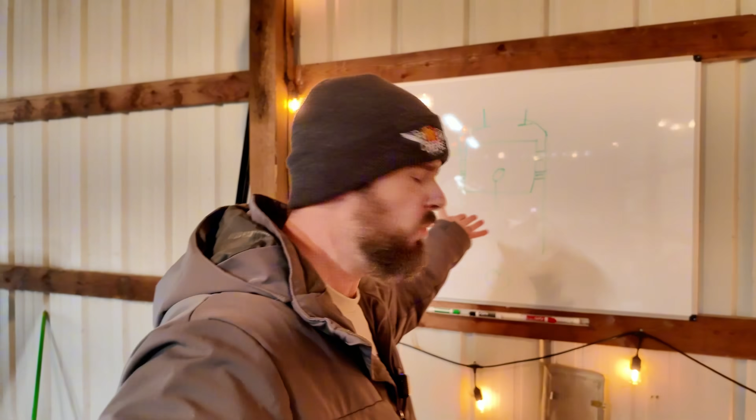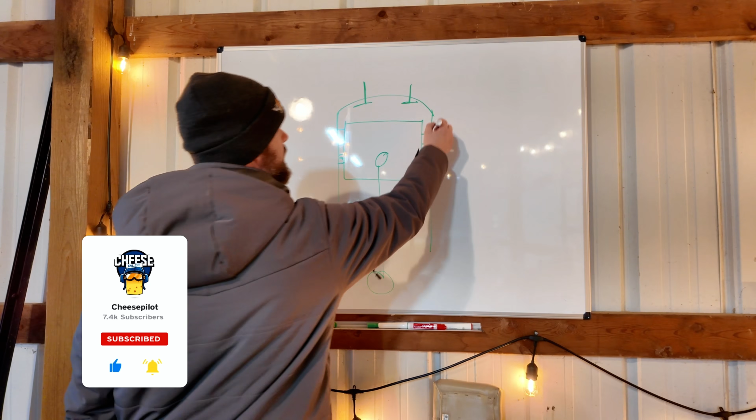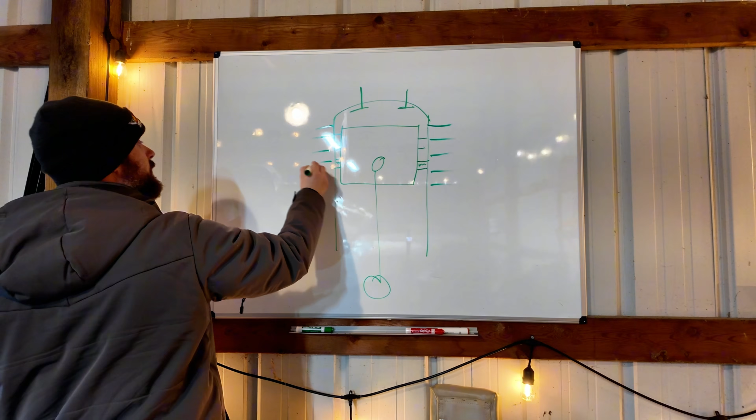So here we are at the whiteboard. We already got a cylinder all drawn out, so we know this is our piston, right? The piston rides up inside the cylinders. Now, this is what you might see from the outside, with all the fins you normally see during your pre-flight looking through the cowling. This is what it looks like inside. You can think of this as a cross section.

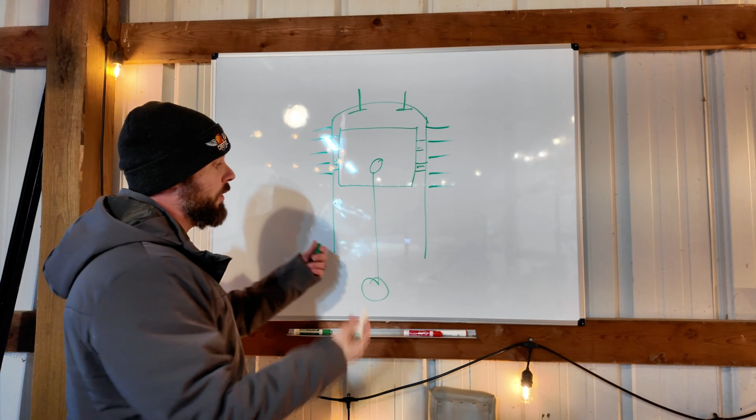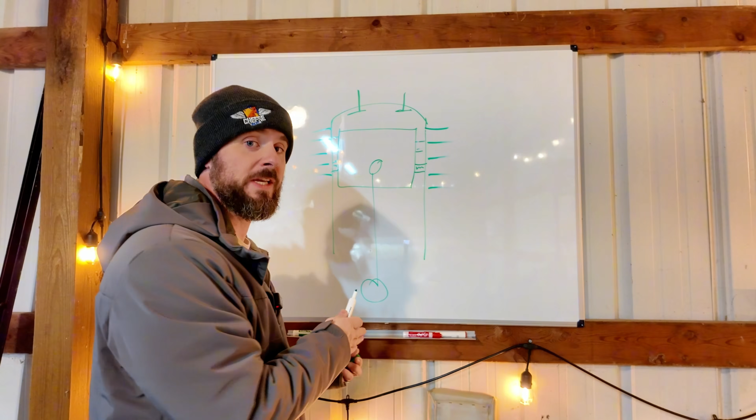As I said, we got the piston, and these are our cylinder rings on the piston. Now, when we did that top end overhaul, we didn't replace these cylinders. All we did was measure them for dimensionality, making sure they fell within the brand new Lycoming spec, not the used, not the overhauled — the brand new Lycoming spec.

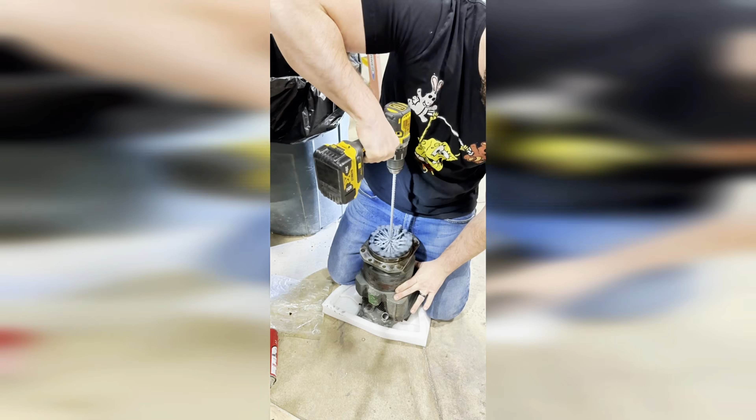Since we introduced new cross hatching on the cylinder walls, meaning we took a ball hone and rode it up and down inside the cylinder walls to reintroduce cross hatching, and we put new rings on it, these rings have to break in. These rings have to conform to this new cross hatching.

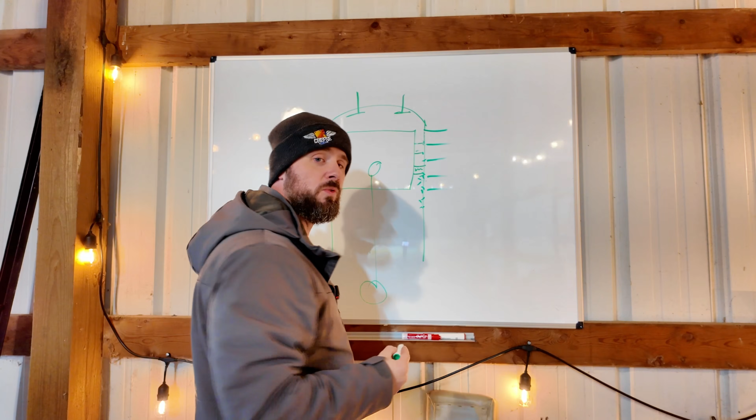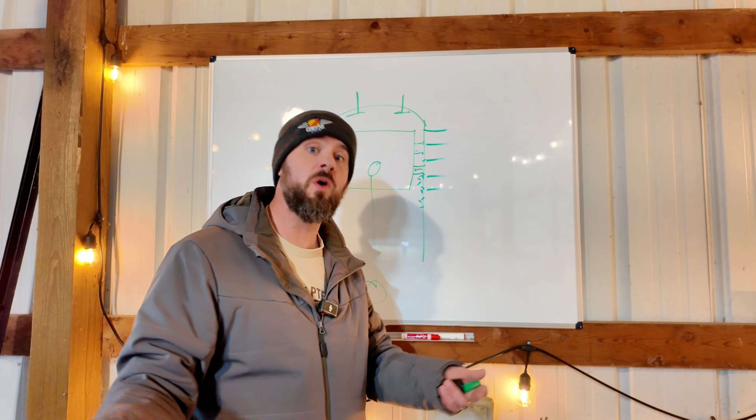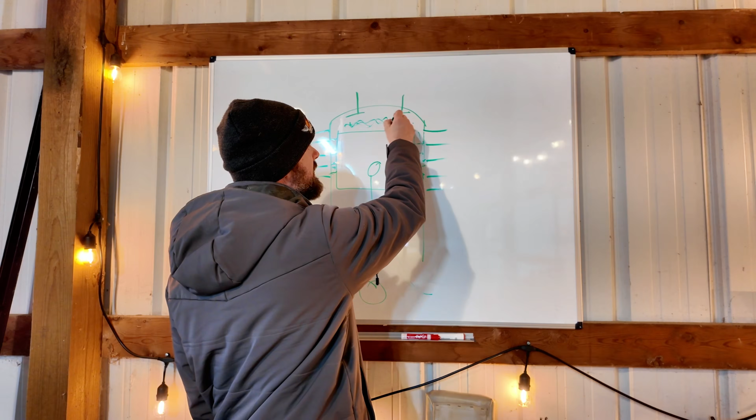Now what does that mean for us? How is this going to impact the way we operate this engine? Well, according to the Lycoming overhaul break-in manual, what we want to do is keep as much pressure above the piston as possible, because what we don't want is the oil that gets up into these cylinder walls to get past the rings.

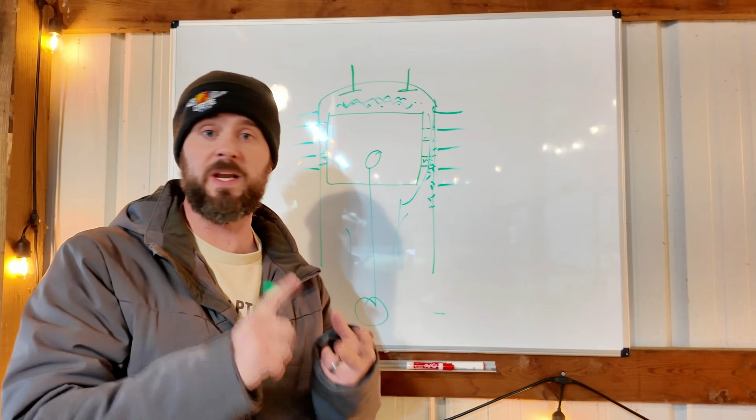Because if it gets past the rings, the heat generated from up here will actually cook that oil and bake it to the cylinder walls, glazing them. And if the cylinder walls get glazed, we end up losing compression, burning oil, and having to take the whole engine apart again to reintroduce more cross hatching and clean out the oil coking. So we want to make sure we break in these engines appropriately.

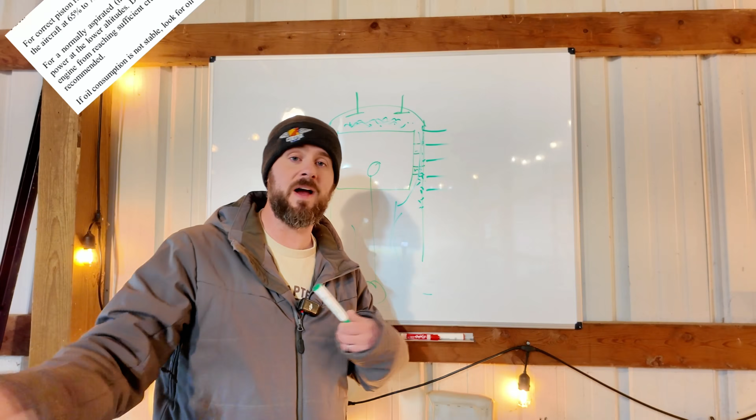So we're not going to do any zero power descents, or at least not any extended ones. We're not going to be doing a bunch of pattern work. We're going to go up and do laps — just circles at around 2,400 RPM and around 24 inches of manifold pressure, because the manual calls for 65 to 75% power, and 24 inches is right around 70% power according to the Lycoming manual. So let's get the airplane ready and let's go fly.